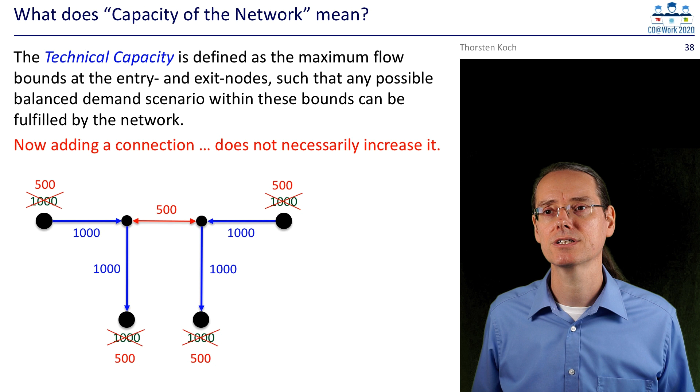This is something to keep in mind. And apart from this, there's also the coupling to the pressure. So imagine we have 80 bar here and it goes then to 70 and to 60 bar that way, and the other is 50, 42, 34 bar. And now we connect the two. Obviously this is not going to work because we have a connection there from 70 to 42 bar, which basically says there is a higher pressure coming from one side to the other, and this will limit what is possible to transport.

So what we can do here is put in some active elements like a regulator or a valve to control the network in the right way. It's really kind of a complicated thing to get right, and there's also some old theory even for traffic networks which is called Braess's paradox, which is also a nice example where you add a connection to a network and actually the capacity goes down. This always happens if you have no full control over the flow, but kind of the flow decides itself, like here with the pressure, or in a car network where people want to take the fastest route, and then it might get longer for everyone, or in this case, less capacity.

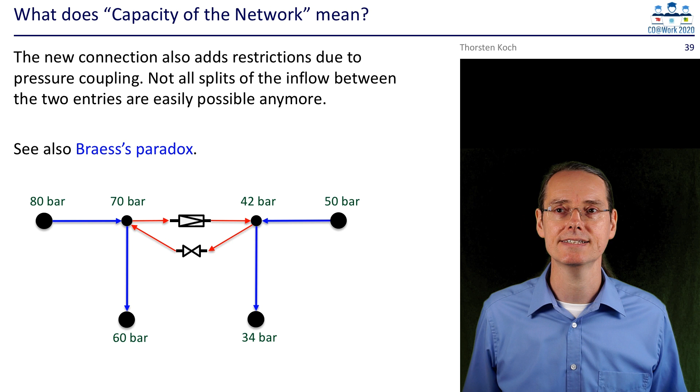So how do we compute these things? The correct way would be to have a transient model, since we're doing things over time. This is a realistic way to do the computations. But on the other hand, you can only compute this over a finite time horizon. As I said before, you're basically somewhere in the middle always. So if you want to compute some capacities, it requires a forecast of the in and outflows over time, on the one hand.

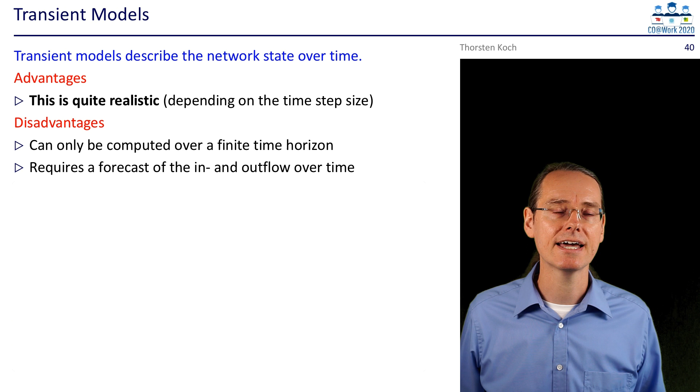And on the other hand, we need a start state for our planning. This is kind of okay if we are talking about now, because we can just look up the start state. But if we are talking about planning, it gets a bit difficult. And the other thing is that since we're doing computations, the deviations between the predicted and the physical network will grow over time.

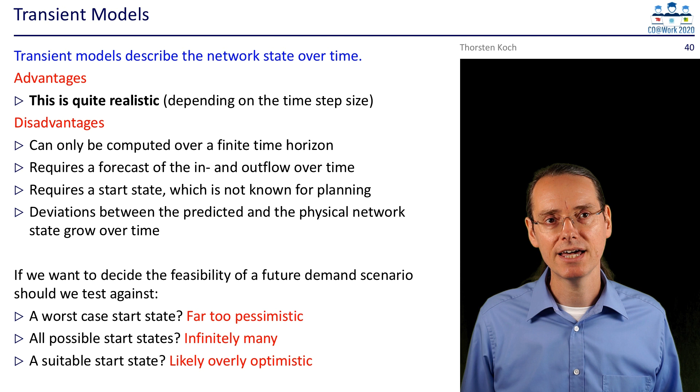So if we want to decide feasibility for a future demand scenario, for planning purposes, the question is what do we take as a start state? We could take a worst case start state, basically an empty network, which would be too pessimistic. All possible states is impossible because there are infinitely many. And a suitable start state, well, if we assume a suitable state, pretty much everything is possible, so it might be overly optimistic. And once you have a start state, you still have to decide what your prediction for the future is, and there you get the same problems.

So for planning purposes, stationary models which describe an equilibrium network state might be a better choice. By definition, they describe a stable situation, kind of an average network state, because we have taken the time out. There's no start state needed, no time horizon to consider, and it ensures that the situation is always sustainable.

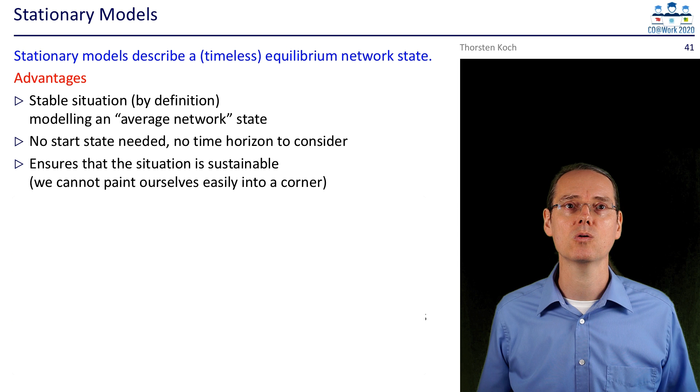And you need much less data. The physics is simpler, so it's all nicer in a way. The price you basically pay for this is that it's less precise or correct.

And the worst thing is that there is gas stored in the network, called line pack, and this cannot be modeled. This line pack helps you a lot in peak situations, which stationary modeling might be too pessimistic about. The other issue is that the transition between certain states of the network also cannot be modeled, because you are in a timeless state. So these are the main things you are missing: basically the store capacity of the network and the way of the transition.

But for medium and long-term planning, it's the better way, or maybe the only way, because for transient modeling you just miss the data.

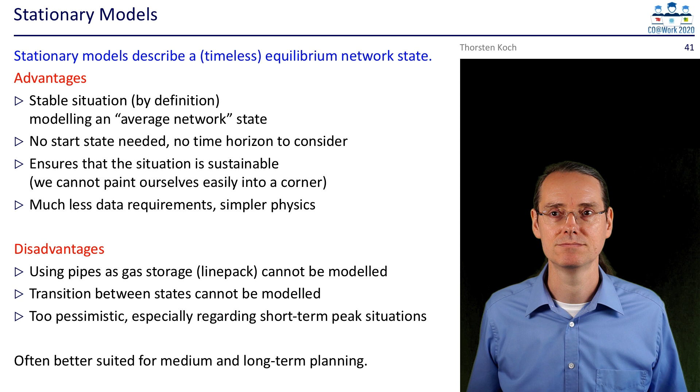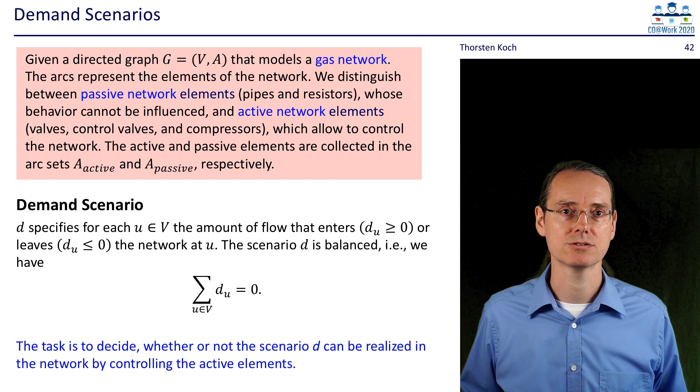So as a start, let's assume we have some scenarios and want to compute them and see whether they work. Let me first define a scenario. This is basically: you're given a network, and the inflow and outflow demands balance out. What we are looking for is a setting of the active elements of the network such that this scenario actually works out.

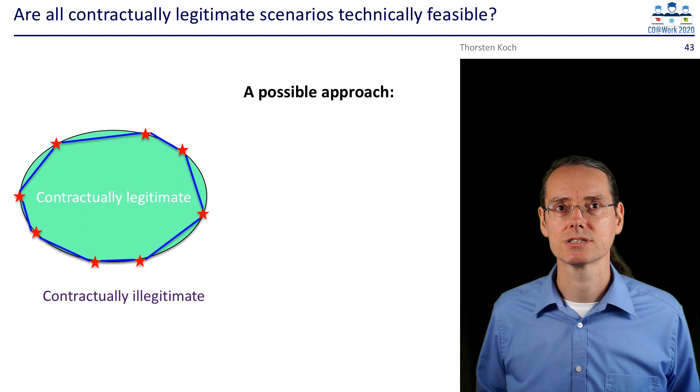Now imagine we want to see whether contractually legitimate scenarios are technically feasible. There are the following possible approaches. We can have experts derive scenarios that are on the border of feasibility. These scenarios are then checked using stationary models, and if they are feasible, it's concluded that all other scenarios are feasible too. So this would look like this.

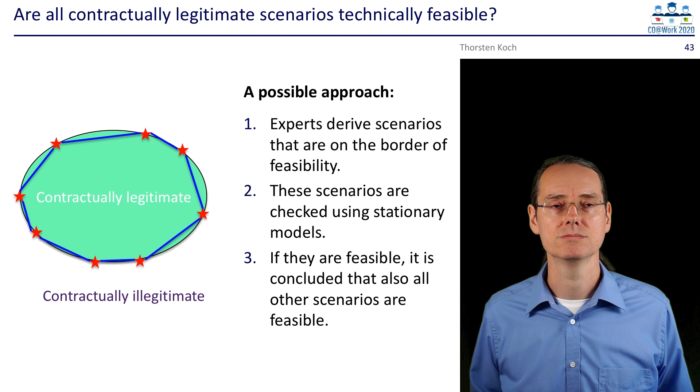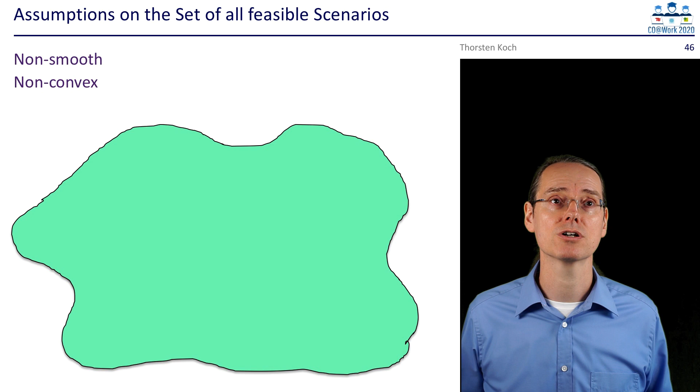So which assumptions do we put on the set of our scenarios? It looked nice here, but actually it might be non-smooth, non-convex, or even non-compact. So in the end, the feasible area might actually look like this. And then it's a question whether this approach was a good one.

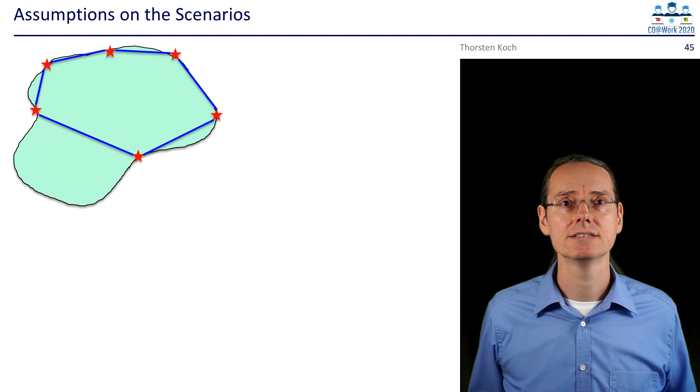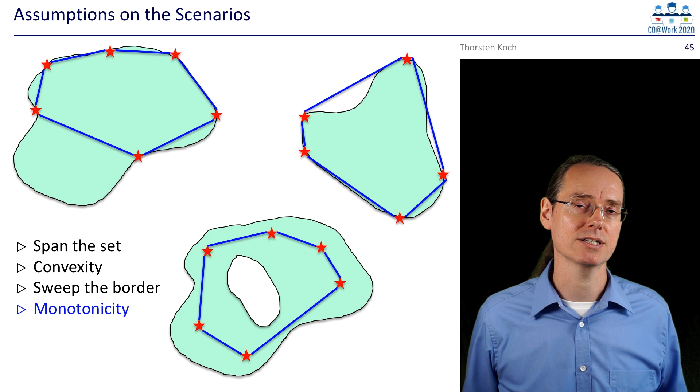So the assumptions we have to make on our scenarios are that they span the set, that they are convex, that they sweep around the border, and that in between there's some monotonicity. These are all assumptions which are not precisely mathematically correct. There can be found counterexamples. Whether they are true enough to believe in practice is another question, but there are certainly some problems here.

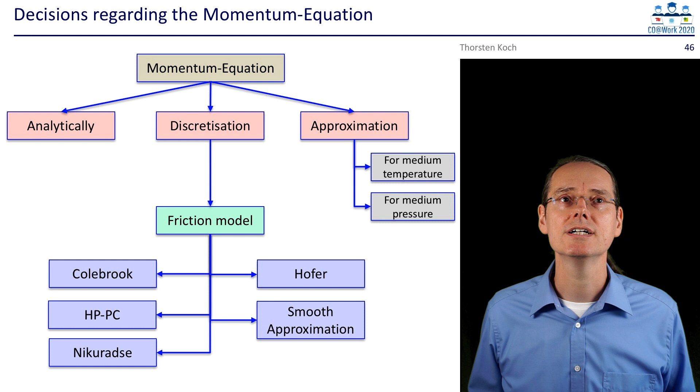In general, there are some decisions regarding the momentum equation. We have the correct equation, and then we can look at it analytically, through discretization, or as an approximation. And we need some friction model. There are different choices, and depending on what you do, there are a lot of different ways to model just this momentum equation.

Basically, what we are interested in is the border or frontier between the technically feasible and technically infeasible scenarios. But the problem is that this border is not unique. It's not well defined. It differs between models and methods, depending on the parameters, depending on the implementation. It's more like a gray area. This means one tool can say a scenario is technically not feasible, while another tool says it's feasible, and this makes it a bit hard to decide things here.

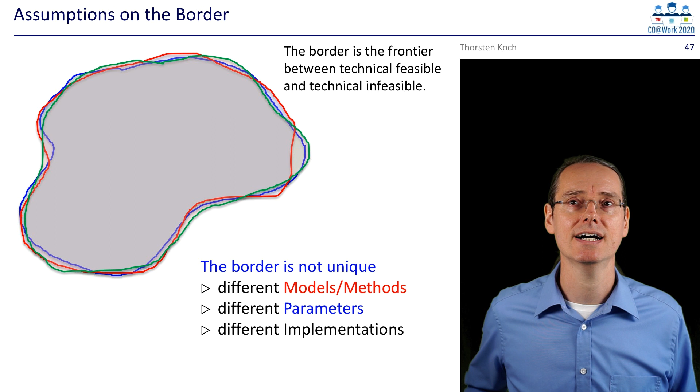And actually, it's worse. What I said is this is the border of contractually legitimate scenarios. But actually, we are not interested in the contractually legitimate area, but the contractually legitimate and reasonable area. I mean, you can always make some worst case examples where every practitioner will say, yeah, in theory this would be allowed by the contracts, but practically it will never happen because it doesn't make sense, or for other reasons.

And this area again is not well defined. This makes it so hard to come up with a good set of scenarios. So it's all crap. I mean, this does not help us now, and we have to solve the problem somehow. So let us go and show some possibilities to generate scenarios.

So here are several ways to generate scenarios. First we have to assume that we can actually create them and that we are able to check the technical feasibility. So then basically there are three methods. We can manually generate expert scenarios. This will be a limited number because it's done by humans. It will have a high quality though, and by definition makes sense.

Then we can automatically generate extreme value scenarios. There it's very difficult to distinguish between contractually legitimate and reasonable or not. On the other hand, we can compute a high number of them. But possibly somebody has to look at the infeasible ones later on and say whether they are reasonable.

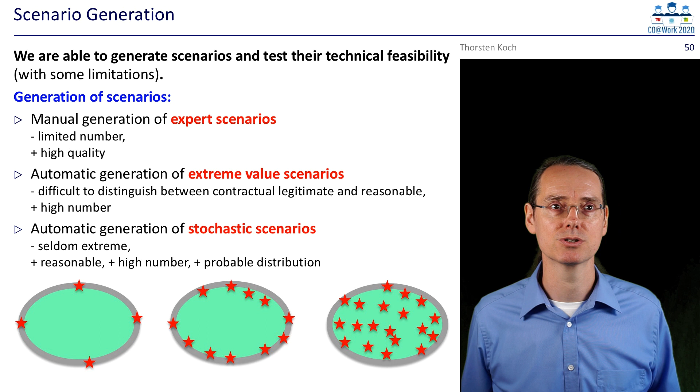And we can automatically generate stochastic scenarios based on stored data. There they will be reasonable, there will be a high number, and we even get a probability distribution. But on the other hand, we will seldom have extreme cases.

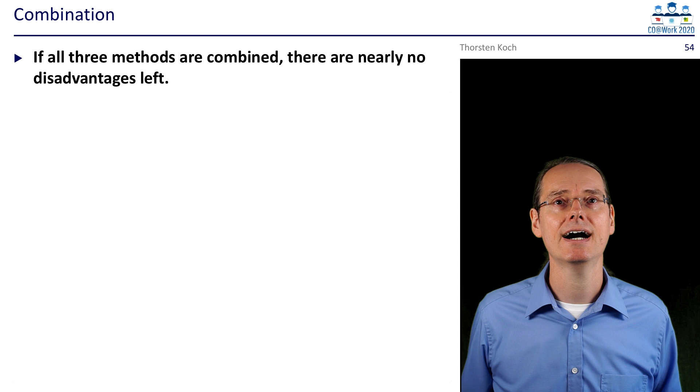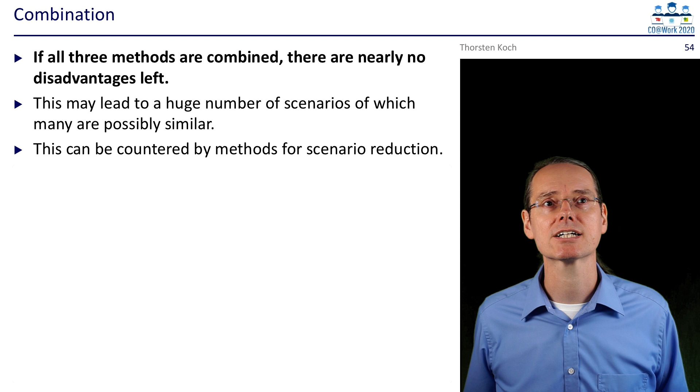So in the end, the best way, of course, is to combine all three methods. Then there are hardly any disadvantages left. This may lead to a huge number of scenarios, of which many are possibly similar, but then there are some ways of scenario reduction where you might get away with this.

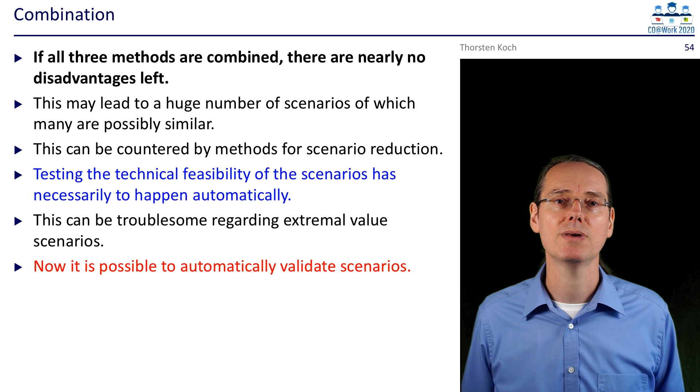But it's clear that the testing of the technical feasibility has to happen automatically, which can again be troublesome with some extreme value scenarios. As I said, they are borderline, and depending on the tool, you might get one or the other result on it. But if you can do this automatically, you can basically...

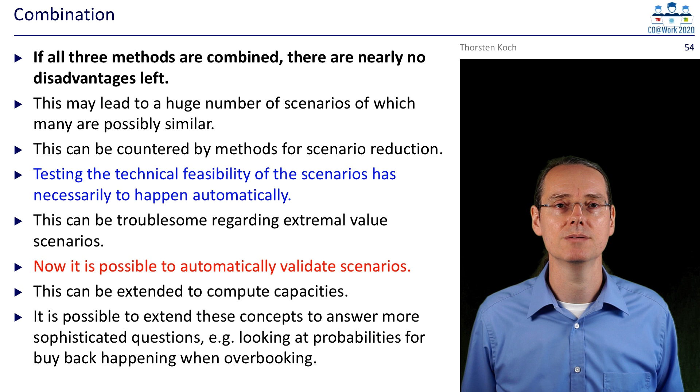...use it to compute capacities. Okay, this leads us to the question of whether to use simulation or optimization. Simulation is nice because it's very accurate, gas physics models, but it relies on humans to decide the settings of the active elements. So basically you can only use it for a limited number of scenarios, and what is worse, if nobody is able to find a feasible solution, it doesn't mean there is no one.

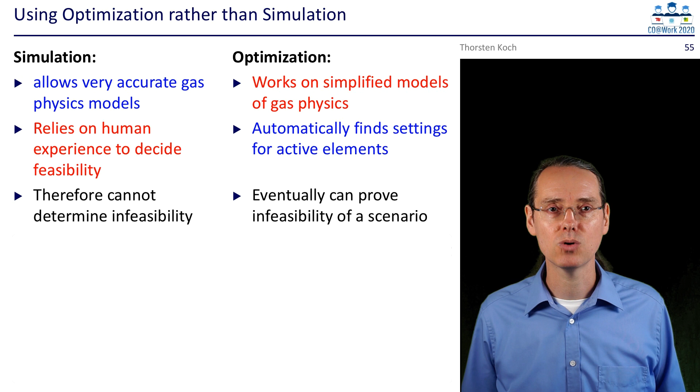It just means there was nobody who could find one. So it depends very much on the experience of the people who operate the simulator. Optimization, on the other hand, works automatically, can possibly prove infeasibility, but then has the disadvantage that it's only working on a simplified model. So the question is again, what this gives you, as we are always interested in the border, and again, this makes the border less well defined.

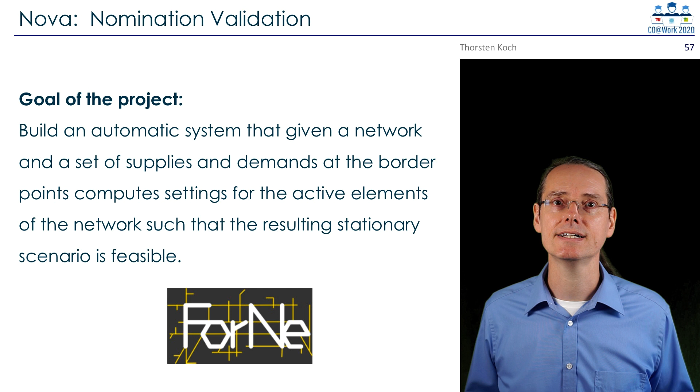So one of the goals of the project was to build an automated system that, given a network and a set of supply and demands at the border points, computes settings for the active elements of the network such that the resulting stationary scenario is feasible.

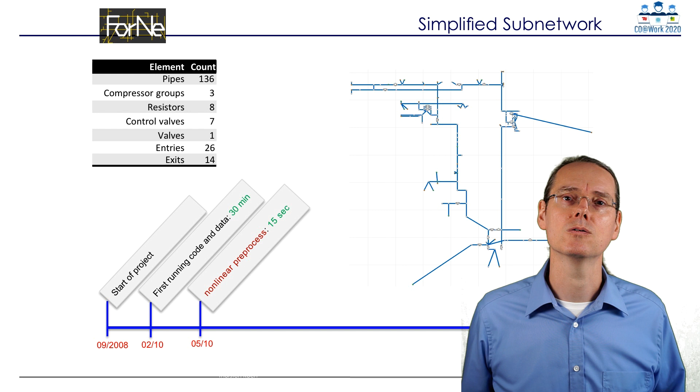Then a few months later, we were down to kind of 15 seconds for the same problem. By October of that year, we had a new MIP approach and could solve a considerably larger network in about 3 minutes.

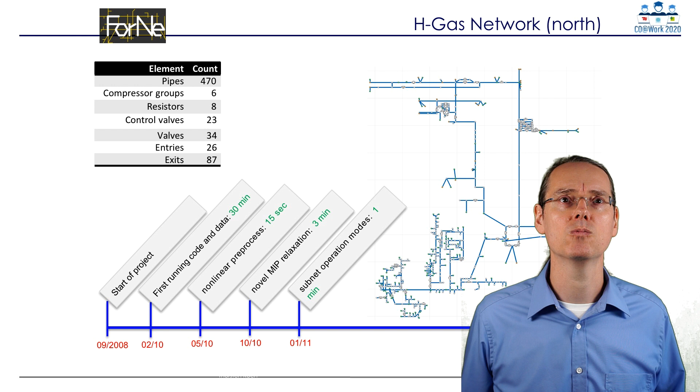Then we implemented subnet operation modes, which is kind of important because basically all the valves and so on in a compressor station are not independent, so there's only a limited number of choices you can have. The model got more realistic, and on the other hand, we again could solve a larger problem with this.

And then a few months later, we were able to solve the L-gas network in about 2 hours, which you can see is already a vast network with 3,500 pipes and a lot of compressor stations and so on.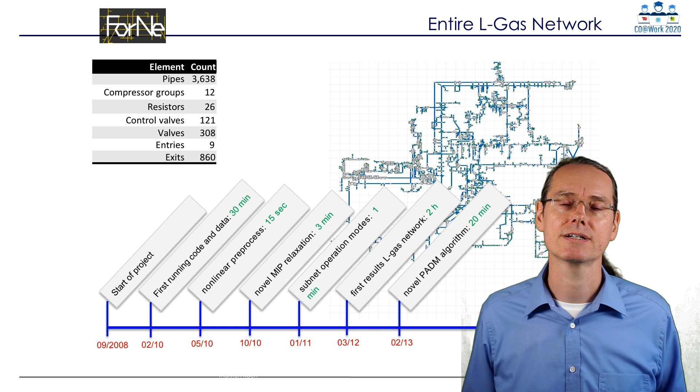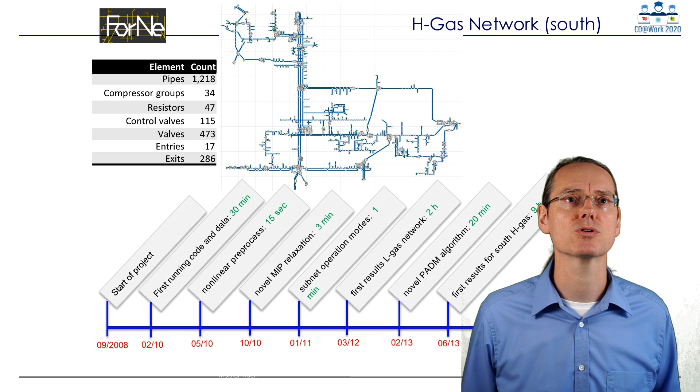Then another year later, we had a novel algorithm implemented and got down to about 20 minutes for the same kind of network. A few months later, we had finally the H-gas network, which has a little bit less pipes, but much more compressor stations and active elements, and could solve this in about 9 hours.

And then by introducing some special heuristics and stuff, we got this down to about 1 hour. This allowed us to solve basically the problems we wanted to solve.

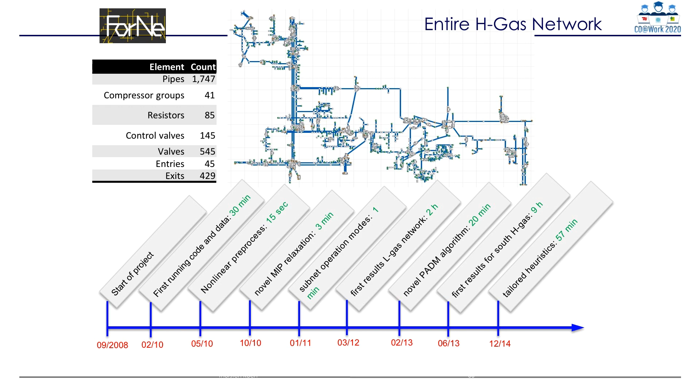Gas networks give you some additional difficulties all the time, which is just a reason of being a real-world problem. Technology is changing all the time. New systems are mixed with existing ones, just added to it. As I said before, it's hard to determine actual system limits.

Because a compressor station runs there for 20 years or something. It might have been measured once, but things change over time. There are changes to the system, and it's kind of hard to get precise information.

Then another thing we experienced is that optimization is actually much more prone to data errors than a simulation, because nothing evens out. So if you, for example, have the inclination of a pipeline wrong and erroneously think it's very much inclined, then the optimization model will use this as a cheap compressor in some way, and this makes it kind of hard.

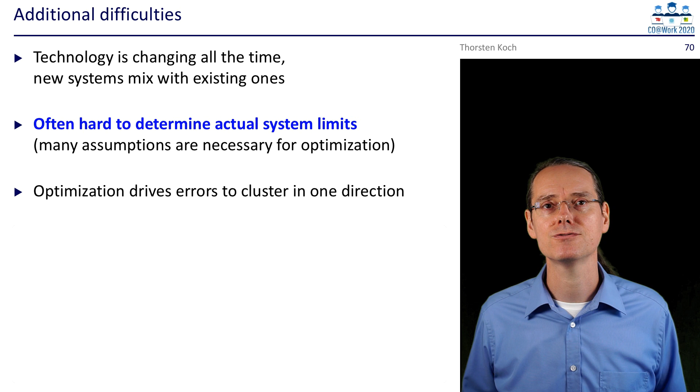You really have to get all your errors out to get good results. And for larger models or scenarios, it's really hard to compare both to reality and to find all the errors and inconsistencies, because it's just complex and it's not obvious what the right answer is.

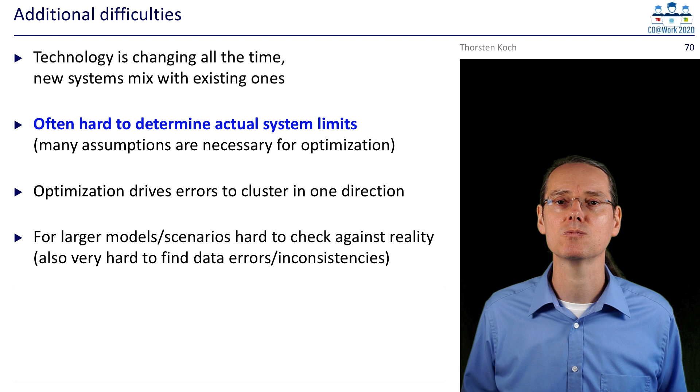And finally, marketization, this entry-exit model and so on, makes it very hard to predict the behavior of the participants, since they're out of the systems and their objectives are not clear or unknown, or might be actually the outcome of a game.

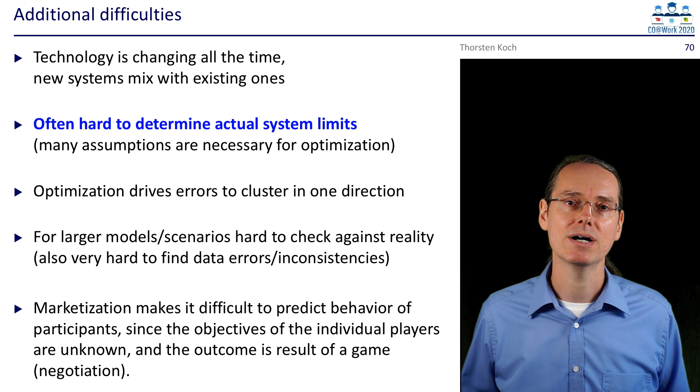So it can be that some trader nominates some amount of flow, and the TSO can tell them, oh, due to a special contract, this is not a good idea. Then he can renominate at some other point. So what actually happens is you have a lot of influence on things, but it might be the result of a game.

So finally, here are some insights I got over the years. Relevant real-world questions can be tackled efficiently with mathematical optimization and algorithmic intelligence. It's possible to solve these problems, however, a substantial effort is needed to succeed. The setup cost is very high compared to pure research.

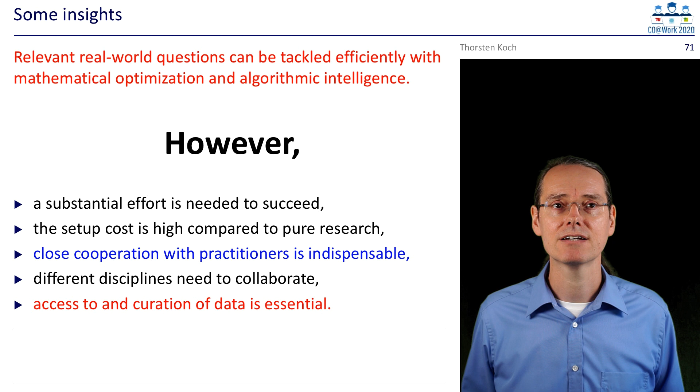You need close cooperation with practitioners, because otherwise you will get nowhere. Different disciplines have to work together and collaborate. And finally, you need access to the data and have to curate, fix, and correct it. This is really essential, and this is a major part of the work.

So if you want to do this, good luck, but it's very rewarding on the one hand, but it's a lot of effort on the other.